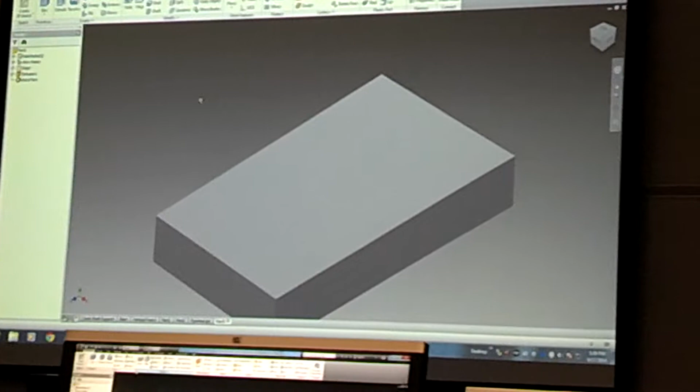Deep it is, the diameter, puts all my GDT symbols in there and all of that. So this part is going to have 4 holes in it, and all 4 holes are going to be a little different from each other. One, I'm going to put a counterbore hole in, I'm going to put a counterbore tap hole, and then a blind drilled hole. And I'm going to show you how to do it using one sketch.

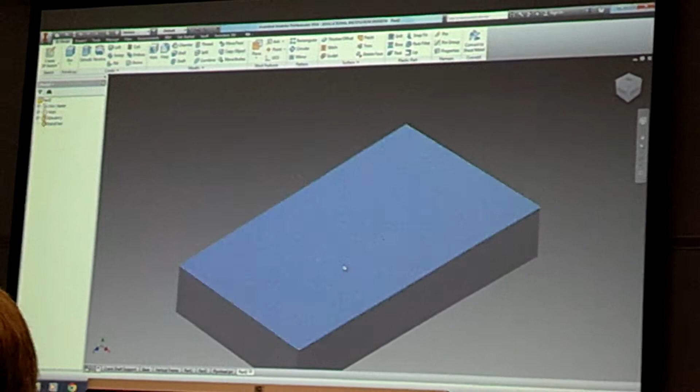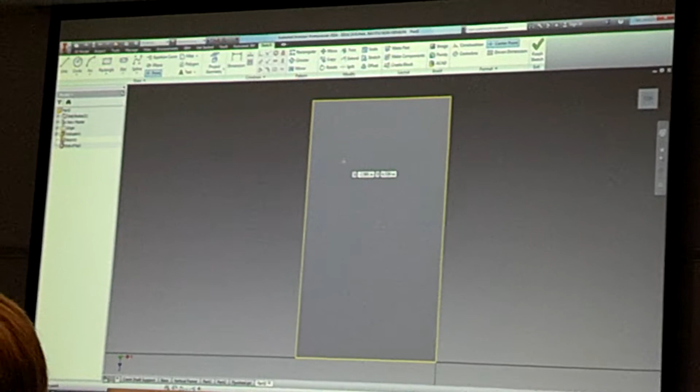All right. So the first thing I want to do is to go ahead and put a sketch on the surface and right-click to get that new sketch. Turn it so it's facing me. And then I'm going to go to this tool right here called Point. All right? Because I have 4 different holes, I have to put 4 different points. If I put all 4 points in my sketch at once, I'm going to show you what happens. If I go boom, boom, boom, boom, I would dimension them out where I want them to be.

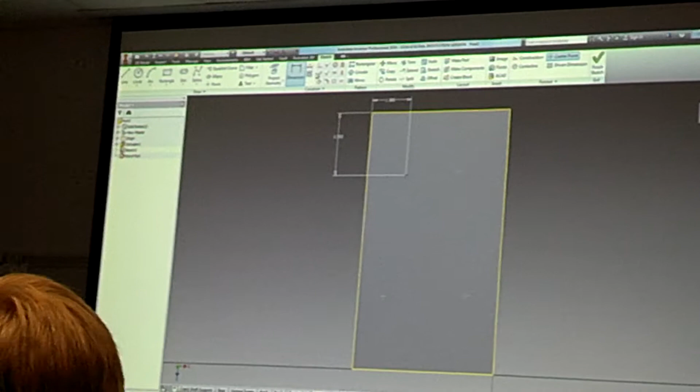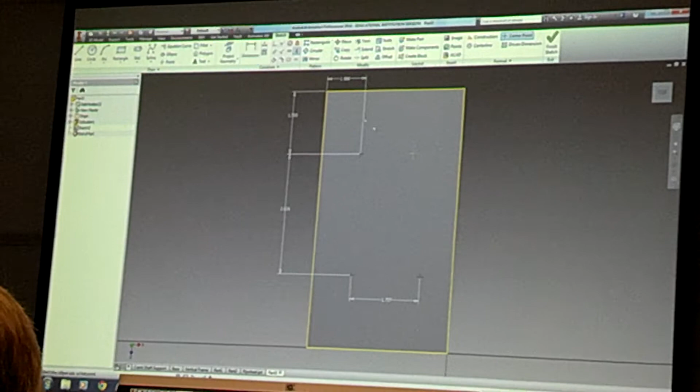This one, this one, this one, that one, that one, this one, this one, this one. So everybody's blue now, and I don't mean sad. Okay, so I finished my sketch.

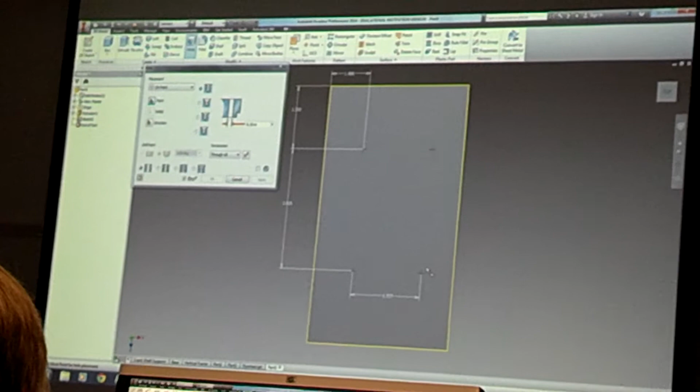If I click on my hole tool, you can see when I go to the From Sketch or On Point, see I can't use the On Point. I can't select my point, can I? Because that point is actually a sketch point. It is not a work point. So I have to use the From Sketch, and when I use the From Sketch, what happened? Holes. It selected all the holes, right? But they're all different. So I need to do something different. So this won't work this way.

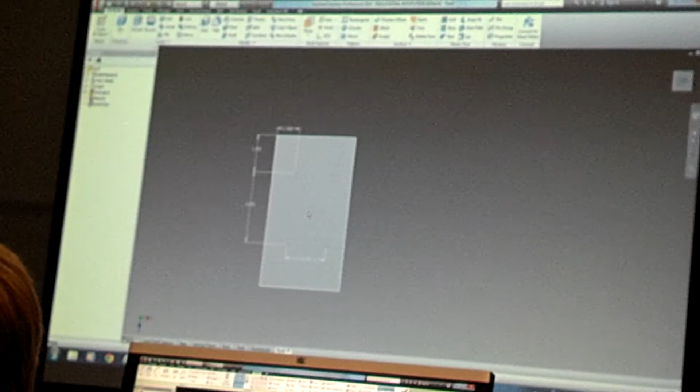So I'm going to go back in here, open my sketch up, and I'm going to delete 3 of those points. Now I'm going to finish my sketch. Now this kind of looks like it's actually harder than it is. It's a little time consuming, but it comes out better in the long run. And I'm going to show you why.

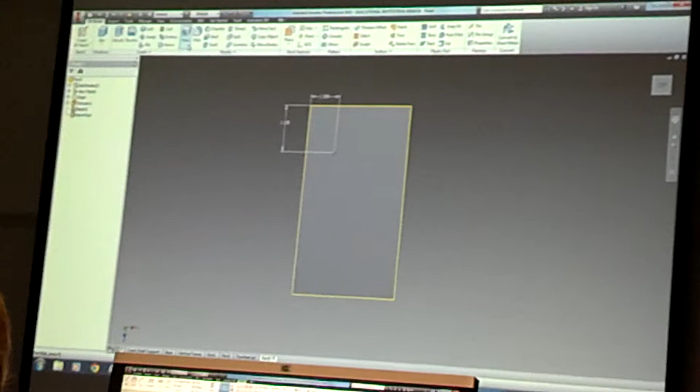So now I go here, and I'm going to make this one a through hole, and I'm going to make it 0.5 inches in diameter, and it's just a straight hole, straight through hole. So I don't have to do anything else with it. It's drilled, boom, I have my hole in there, right?

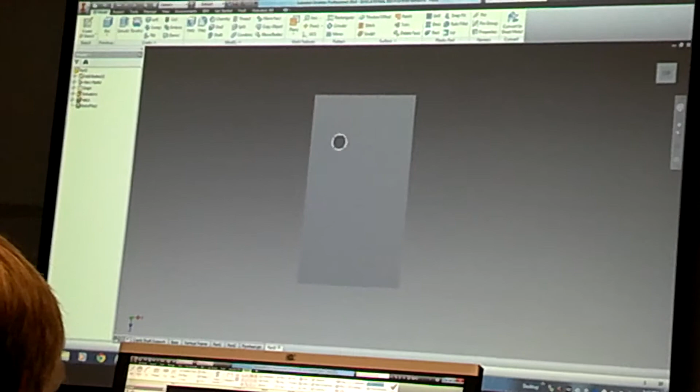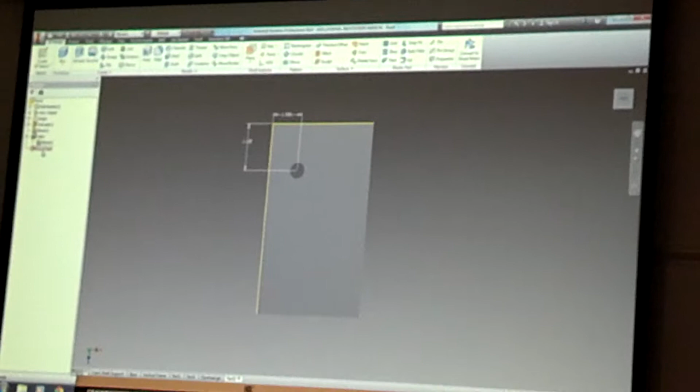I now go over here to this hole, and I click on the little plus sign and it will open up. I go to my sketch, I right click, I go to share sketch. Now my sketch has become a little hand with a pencil in it, meaning I can share it with other features. Okay, I can do more with it now. So I'm going to go in here and I'm going to double click on that sketch, and I'm going to put my next point in.

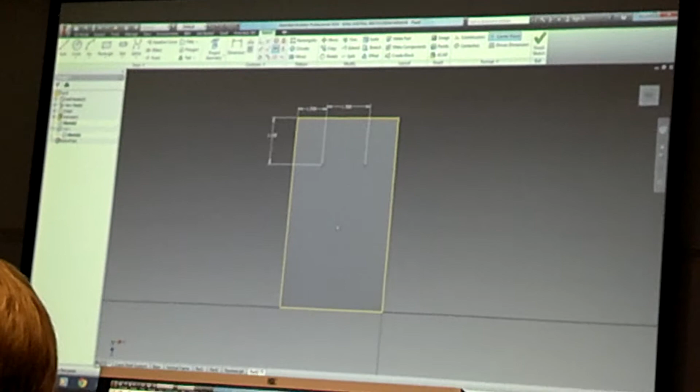I'm going to make that 1.5 apart. I'm going to make sure it's horizontal. It's now blue. Alright. I then finish my sketch. I go to my hole tool. It's selected it already. Well, this one I want to be a counterbore hole.

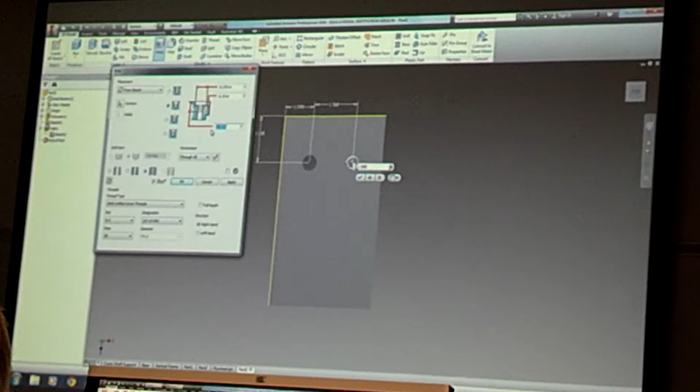I want it to be tapped. And I'm going to make it, half 13 looks good. But 1/4 inch depth there is pretty good. I'm going to change the depth of that thread because, well, we'll make it so it goes all the way through, so it's long. Obviously, if it's a half inch diameter hole, 3/8 counterbore isn't going to work, so we'll make it 3/4 of an inch. I click apply or OK.

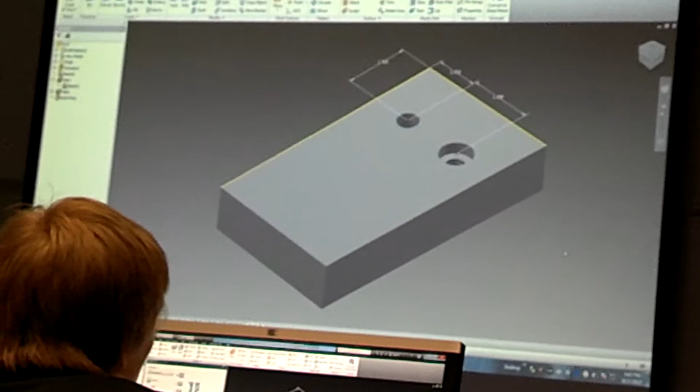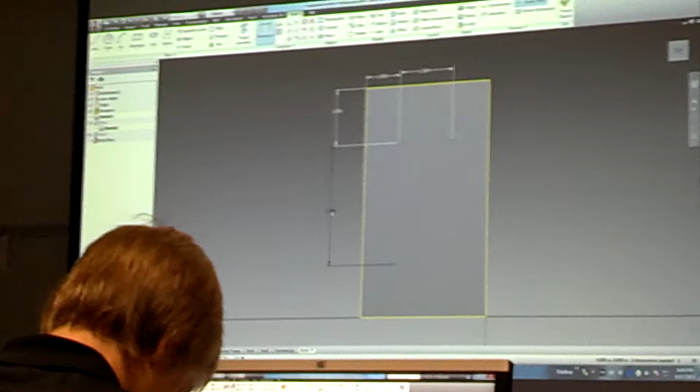It's now there. And if I turn this, you can see I got my little counterbore hole with holes in it. I come back to my sketch again. I put my next point in. I make sure it's vertical to this one. I give it a dimension from here to here. And we'll just go with 3.

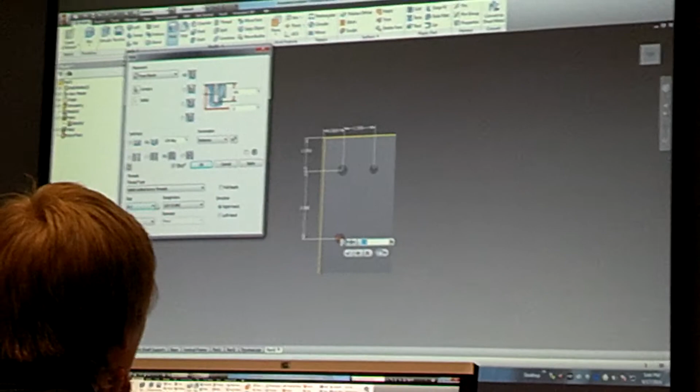I finish my sketch. I go to my hole tool, and we're going to make this one a tapped hole, but it's going to have a distance, and we'll leave it at half 13, but its distance is going to be 0.75.